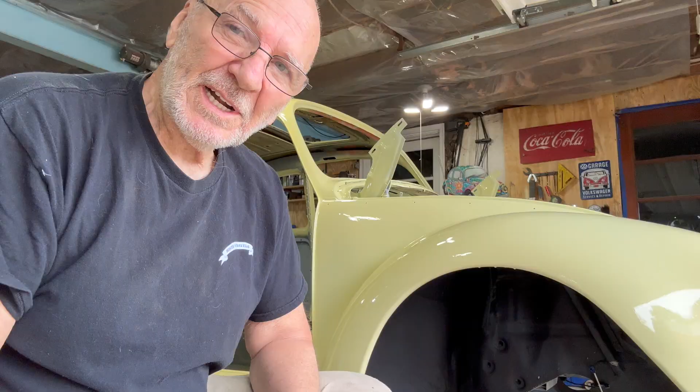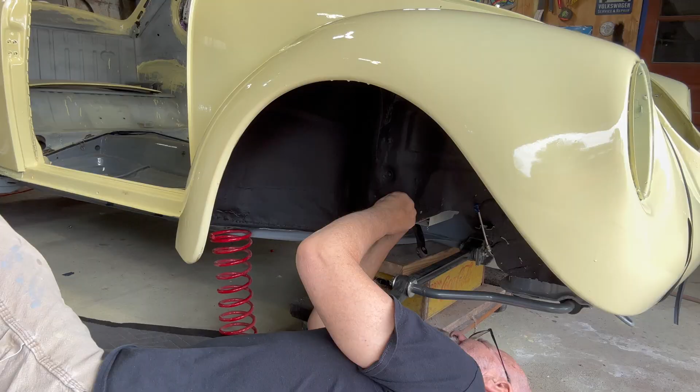First thing we're going to put in is the idler arm, then the steering box. Okay, we get the ratchet now, tighten that up. Okay, that's good, it's tight. Idler arm's in. Now the steering box.

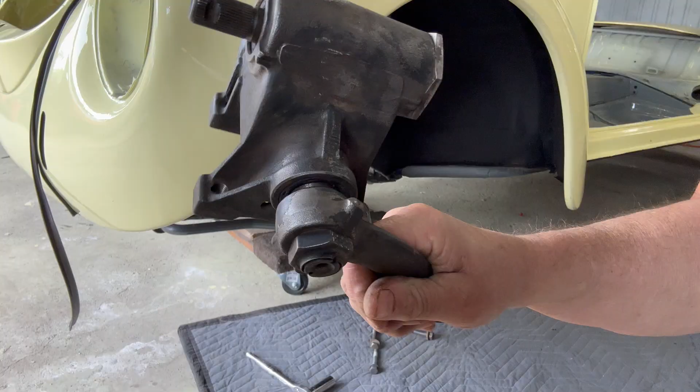Now the steering box. We have a new bushing in there for the steering dampener. Let's get her in.

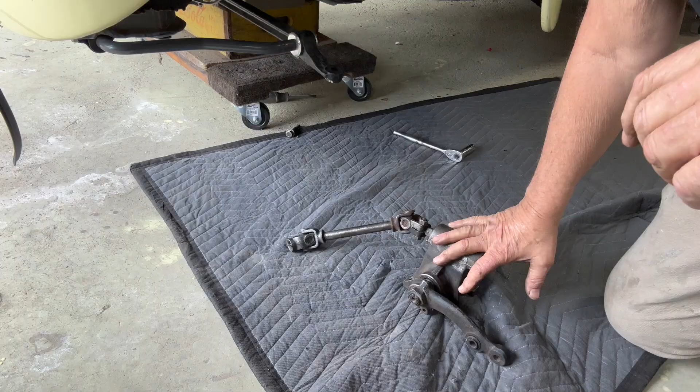Steering box is a little bit on the heavy side. After trying to put it in, it was a little bit of a struggle because it's heavy.

But I realized I believe I need this on in order to make this fitting locked in. So the universal at each end of this little drive shaft that turns the steering box needs to be coupled on the bottom first, I believe. Not 100% sure, but that's what I'm finding out. Okay, I'm going to try to get it up in there and get it connected.

Okay, it's going to be a bit of a struggle. Not as strong as I used to be, but we're going to get it up there.

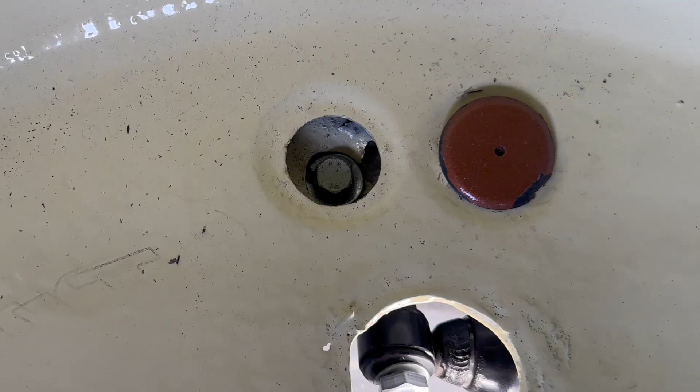Okay, the steering box is in. That's the steering dampener bolt. They're 2 body mount bolts. This is through the Super Beetle trunk. Put your wrench in there and you tighten it.

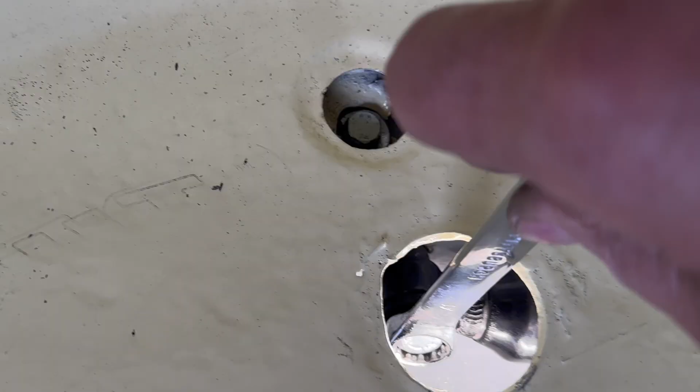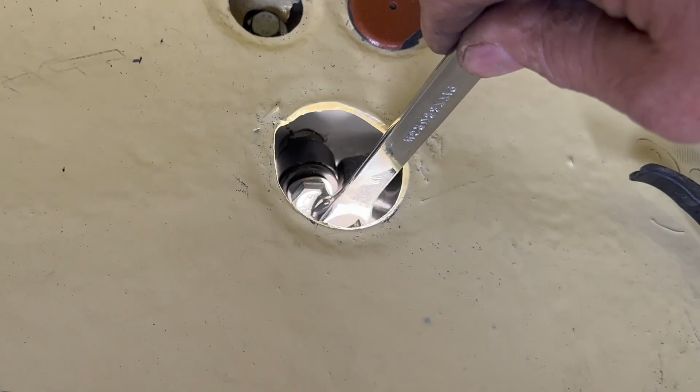A little bit hard to do all this holding it. I'll show you the other end after I get this tight. Okay, she's good and tight. I'll show you the other end and we'll tighten it.

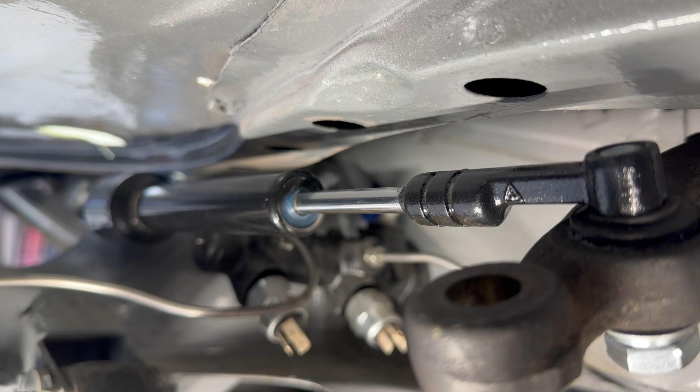Okay, this is the steering dampener. The far left is the side we already tightened through the spare. Now we have to tighten this end. It goes through the steering arm. All right, I'm going to tighten that up. Let's see if I can do it on camera.

I might already have it tight. Yeah, she's tight. That's where you tighten that steering dampener.

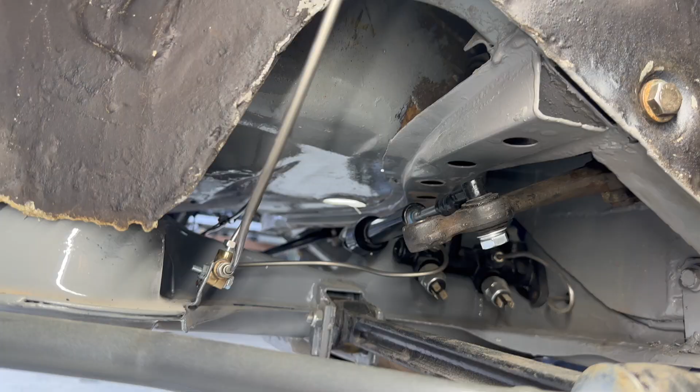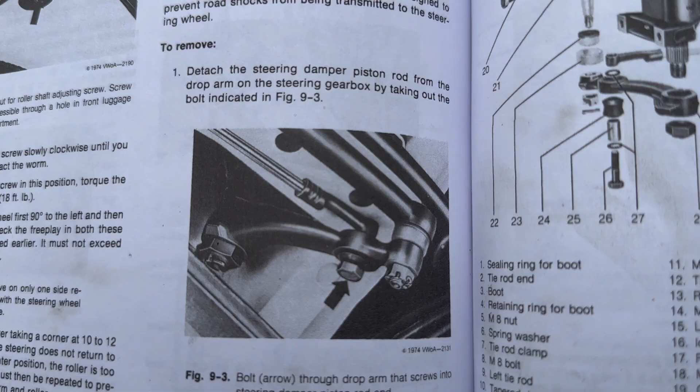Here's a bit of an overview. That's what I did with the dampener, the steering dampener. And this is the Bentley shop book for Volkswagen's Super Beetles. And here's what I'm about to do. It's going to be hard to show you underneath, but I'll show you now.

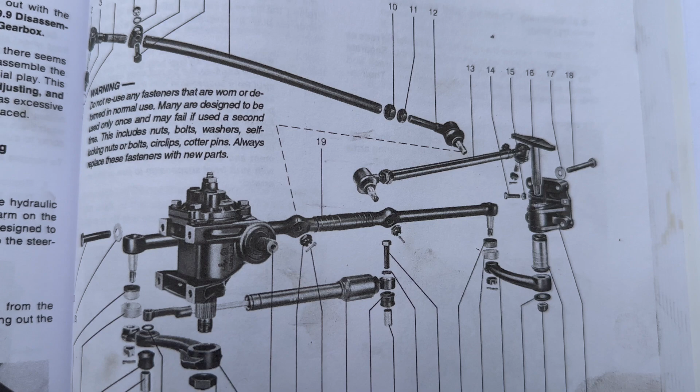I have the steering box hooked up. It's on one end, and on the other end is the idler arm. And I'm putting the drag link that the 2 tie rod ends hook to, which moves the spindles back and forth to make your turning radius. Okay, that's what I'm about to do now.

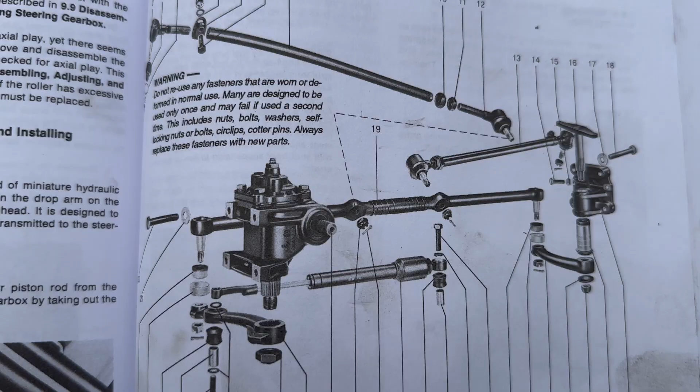Here's the assembly together. I'm going to shove it through from this side into the other side. Kind of hold this like this and run it through.

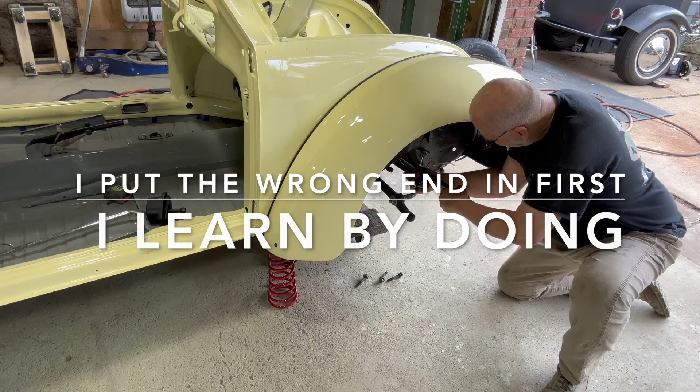The cap comes off here. This goes in the idler arm.

Well, we're going to set the other side up first. Make sure we got this right. I'm going to look at the book again.

Okay, the longest part is what I call the drag link. It drags everything back and forth from where it should go. And it hooks from the idler arm into the steering. And we have to just figure out how.

Let's see what we got in here. Looks good. Gotta mess with the other side.

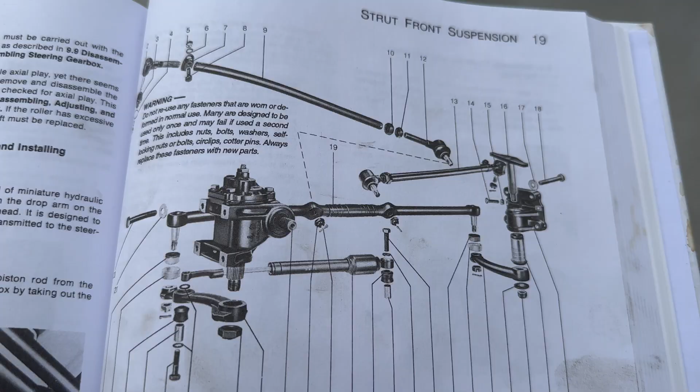Okay, I was struggling underneath there, which I didn't think was necessary to show you because I don't want to teach you the wrong way to do something. So now that I have it figured out, I'll explain to you what my problem was.

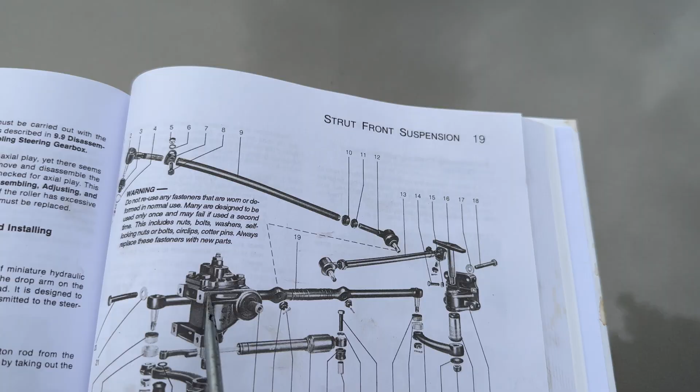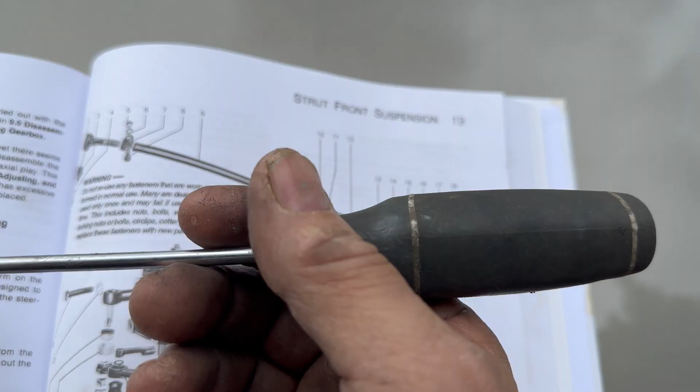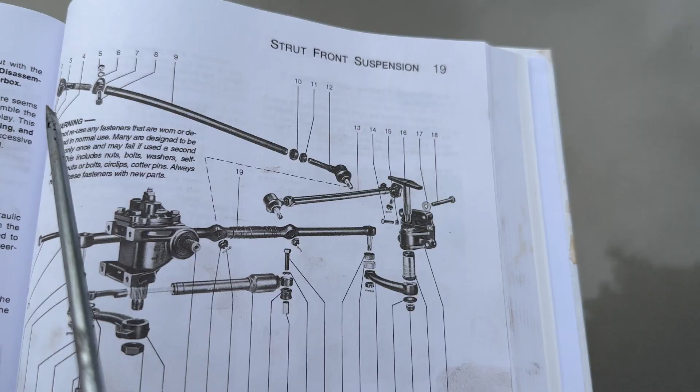This drag link that goes behind the steering box here, goes right across here, that has a right and a left. I had it in backwards where I had to switch it to this side rather than that side, because I couldn't get these tie rod ends into position where they belonged. And the reason was because I had that bar in there backwards.

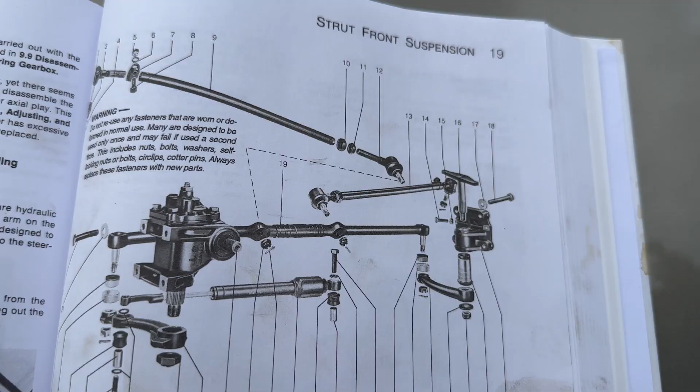So don't struggle like I did. If it seems like you can't put these tie rod ends into this drag link, then flip that drag link around and then you'll have no problem.

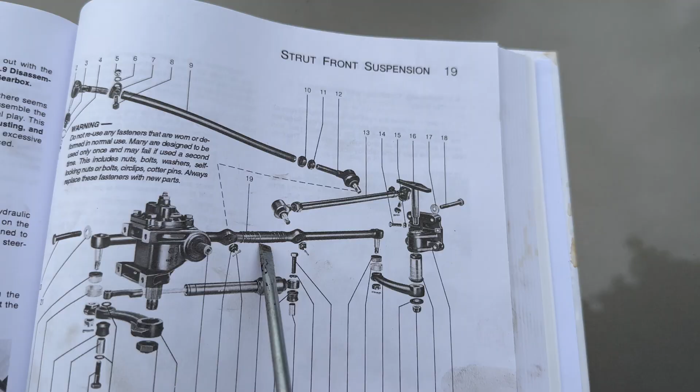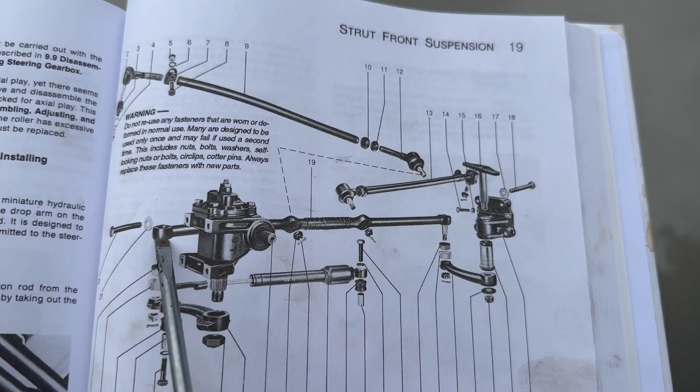I'll show you underneath what it is. Now that I did it, I feel a little silly that I should have just picked up on it to begin with. But you know, sometimes you get off track and you don't realize that there's a right and a left. And that's exactly what happened to me.

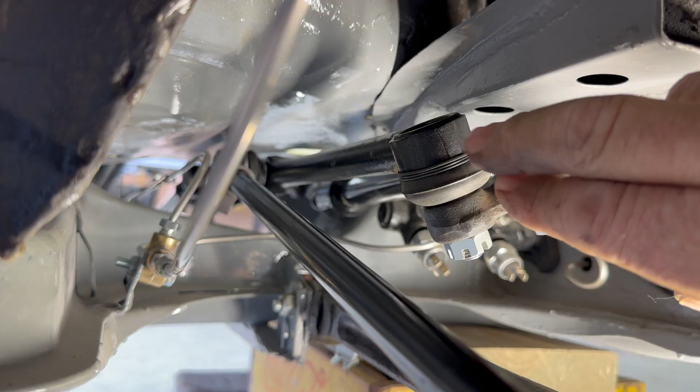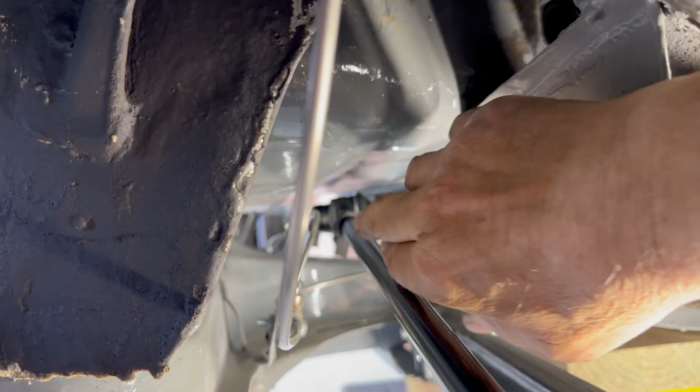So I'll show you underneath. It's gonna be a little hard to explain under here too, but I'll do the best I can. This is the drag link. It goes from here to the idler arm, from the steering box to the idler arm. It has one end specifically made to go to the steering box. If you flip it around backwards, then these fittings up here on this tie rod will not fit.

So I'll try to bring that into focus a little better. See, that tie rod has to go that way on the drag link, and the one on the opposite side also. They should be in front of this trailing arm. I hope that explains what I did. I'm going to show you the other side too. If you flip that drag link around, it ain't going to work.

I'll show you the other side. This is the driver's side, with the steering box. Okay, this is the passenger side. There's the drag link connected to the idler arm, and in the center the tie rod end is connected. You can see the orientation of the ball joints inside the ends, the heads. I hope that helped out. I should have looked at a video before I started. All right, get back to it.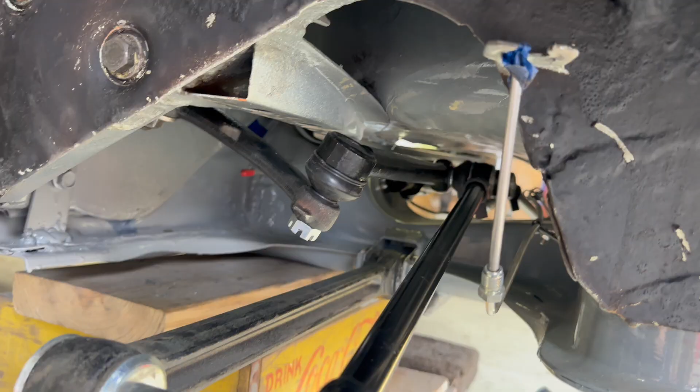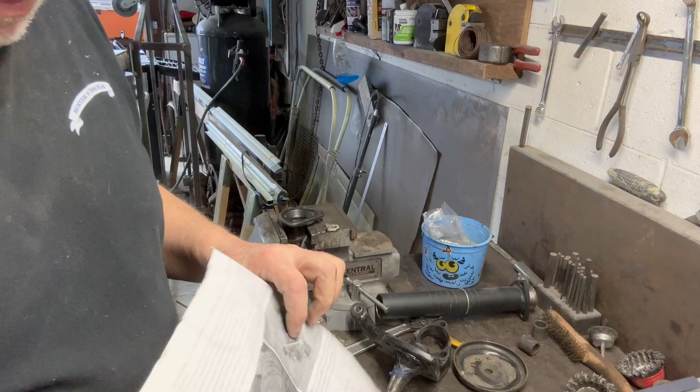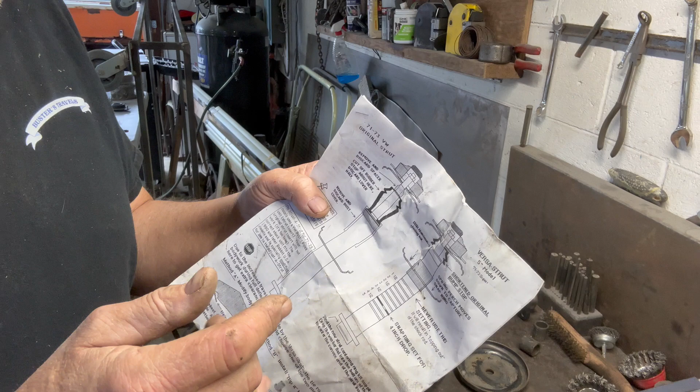Okay, let's build a strut tower. Now I have to mention, this is a TopLine Pro Rally Lowering Kit. Comes with everything needed for the front end, things for bump steer, new stops. It comes with everything you need, and it tells you on here how to adjust. I'm going to go to 4 inches, but I'm not quite ready to do that yet.

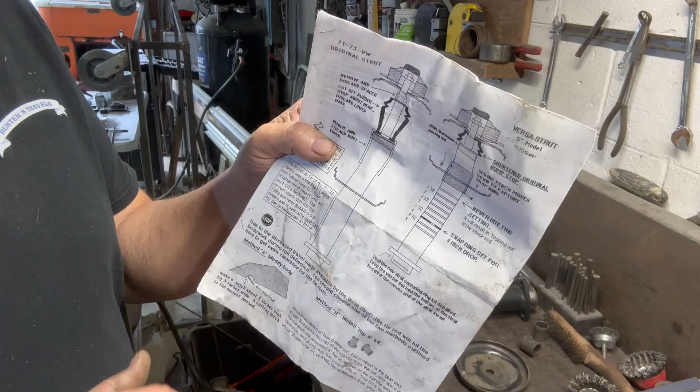I'm going to put the bottom end of the strut tower together and show you how that goes. Now this is similar to a factory one, but it's different at the same time. Again, this isn't a factory one, it's a Pro Rally from TopLine. John is the owner of the business and he's a great man.

Okay, ball joint. Driver side spindle.

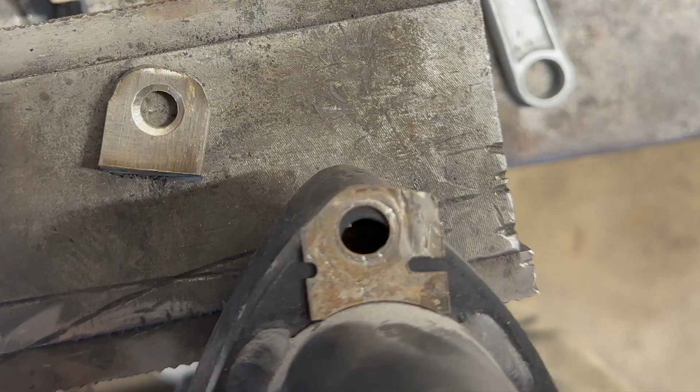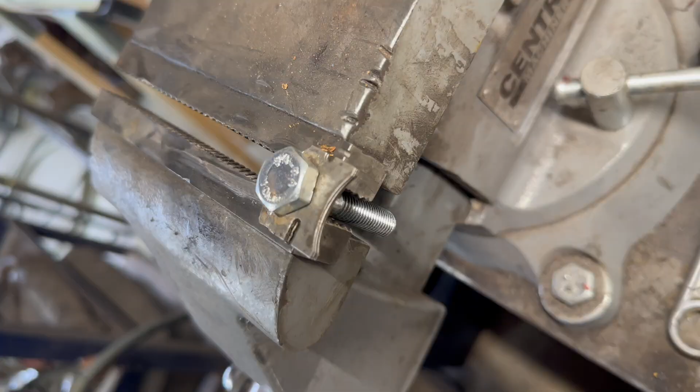I see now we have to trim these down a little bit. I have heard that in the past, so I'm going to trim them down now. I'll show you what I mean. They need to be trimmed a little bit. See, it's not quite centered with the hole. All 3 of them would be like that. We're going to trim them down next. I have all 3 of them stacked together on a bolt. This is where I have to trim, a little bit off here. I'm going to do that right now, and then we'll see if they're where they have to be.

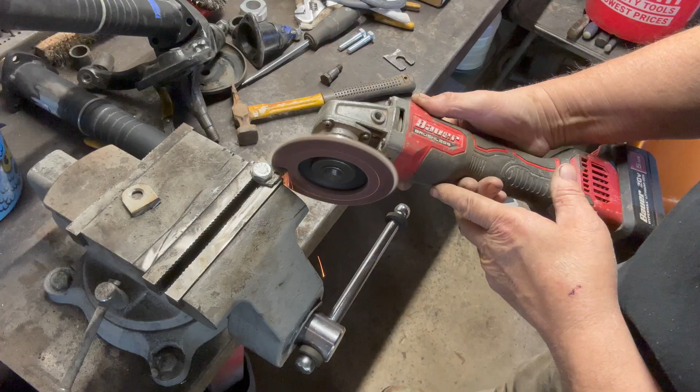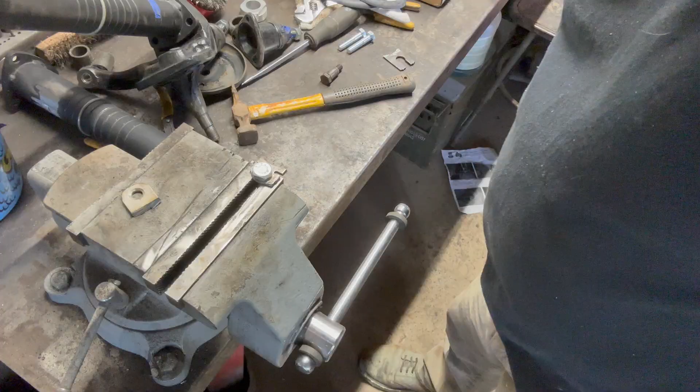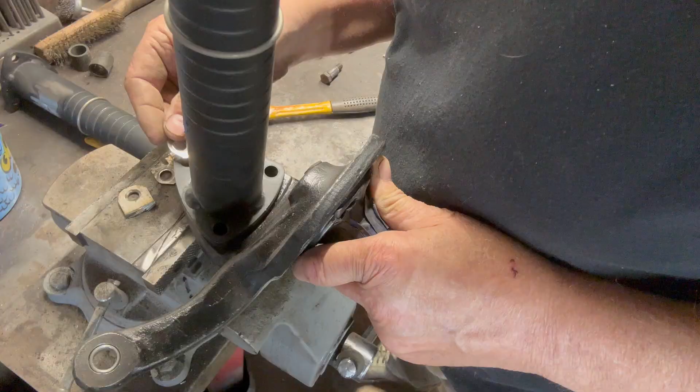Didn't need much, so that should do it. We'll give it a try. We need a little bit more. That should be plenty. Yeah, let's try that again. I like the old sayings, like if at first you don't succeed, try again. I think that did it.

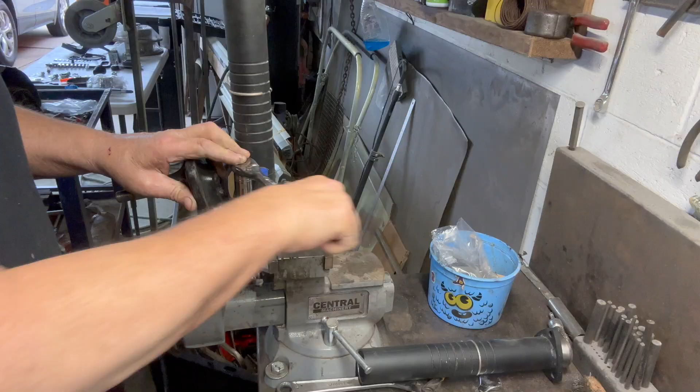Okay, let's tighten these. We're gonna have to use a wrench. It's gonna be a little slower, but it'll do the trick.

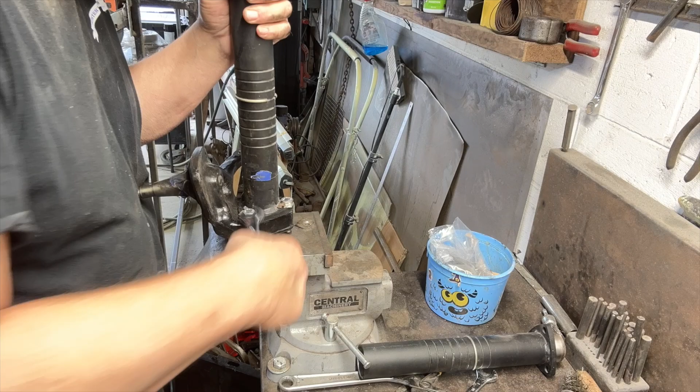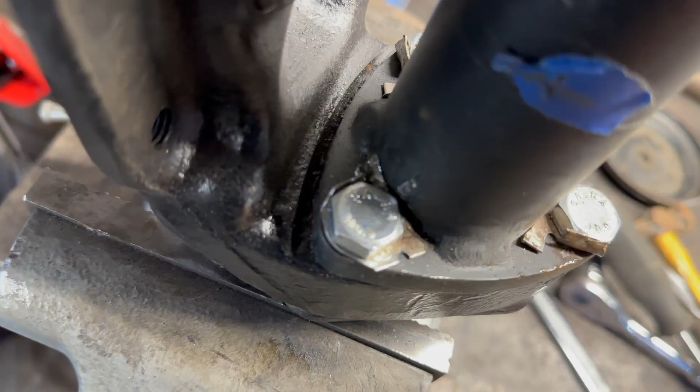Okay, now we gotta bend these tabs up. They'll actually lock the bolt from turning. Here's an up close look. See, the tabs are bent to the flats of the bolt.

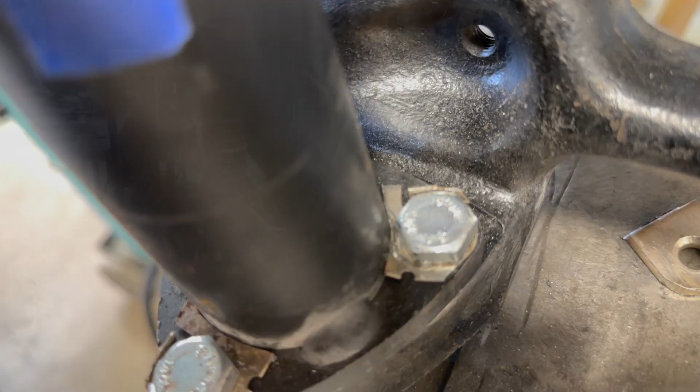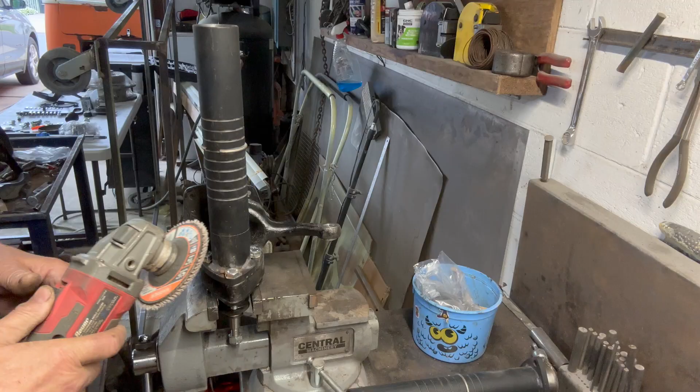All right, next step. These adjustable strut kits don't come with this. This is for the speedometer cable. So I'm going to clean up this spot and weld that on there. They don't come with them on, and I like them on. They give you an attachment, but I'd rather have a solid mount.

Okay, we'll turn the welder on. Like I mentioned, they don't come with the tabs on, so I'm adding them. This is for the speedometer cable.

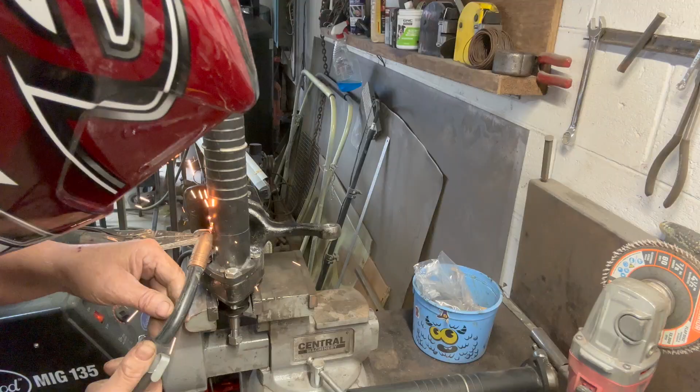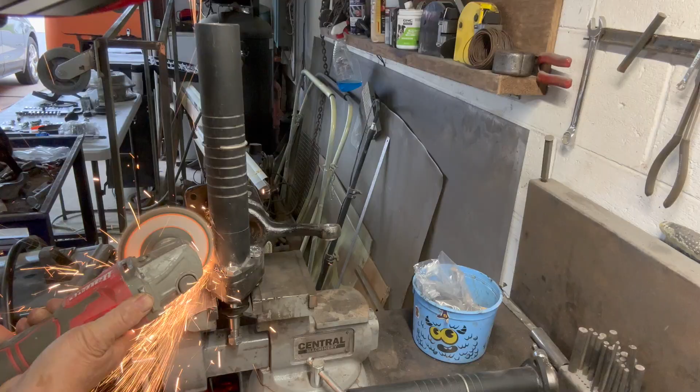Clean it up a bit. Okay, that's for the speedometer cable. That'll be perfect. Now we got to add the one for the brake. We'll weld that on the other side.

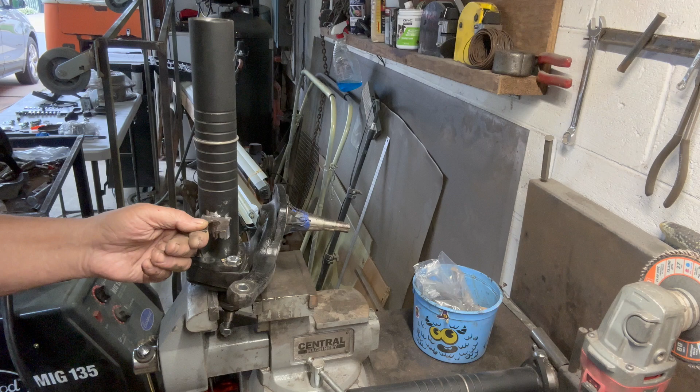You can't just put these in any random location. So I'm putting them here, this is where the flexible brake line will go into it, and then the solid one will come out and go to the caliper, because I'm putting disc brakes on this. I'm going to weld that in place there, and we'll be in good shape.

Okay, we have that welded on. Let it cool down, then we'll go to the next step. Clean it up a little.

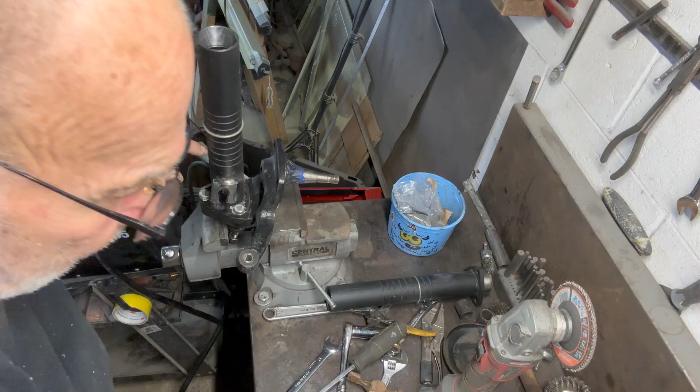All right, now we're going to drop this ring down to the third one. By dropping it to the third one from the bottom, it's going to give us a 4-inch drop. That's what we're shooting for, we're low on the front end, 4 inches. This locking ring is a little tough to move, but you just keep at it. We want the third one up. One more here.

We'll snap it in place. Okay, we're good to go there. We're going to give it a little tap, make sure it's nice and tight. Okay, we'll paint these up a little so they don't rust.

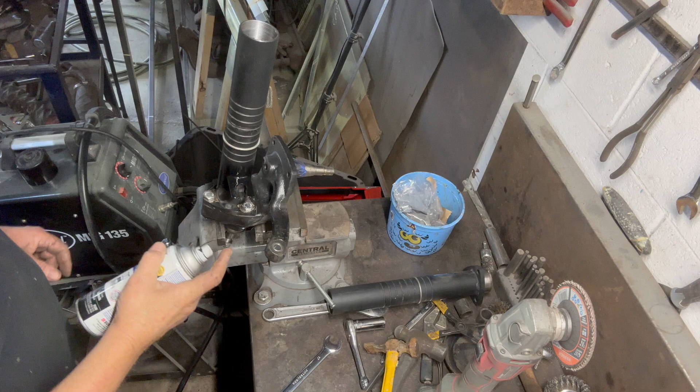Okay, I dropped the ring down to the third, bottom one. That'll give me a 4-inch drop. Now here's the spring perch. That goes on like that.

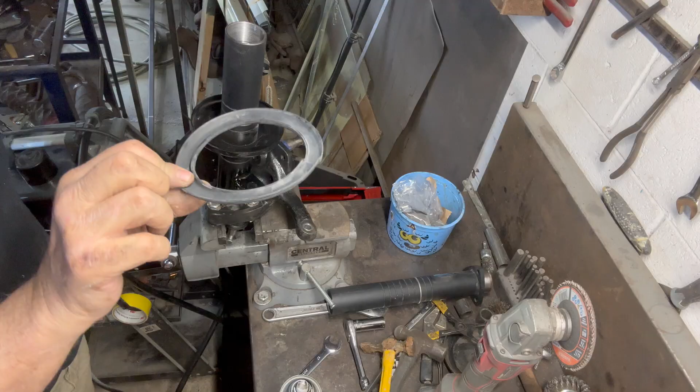These are tough to find at times. It took me 2 months on back order. But they're a rubber, I don't know what you call it. I can't think of it right now, I'll put it in the video. But it's a rubber for the coil spring that holds it and keeps it from making noise, rattling and all kinds of stuff like that. So that goes in there. The spring sets on that rubber.

Next, the TopeLine kit comes with this alignment bushing. Goes in the bottom here, and it holds it centered down inside the shaft so it doesn't move or wobble. And it also has one that goes up the top. So it holds it nice and steady inside there so you don't get movement. Nice design.

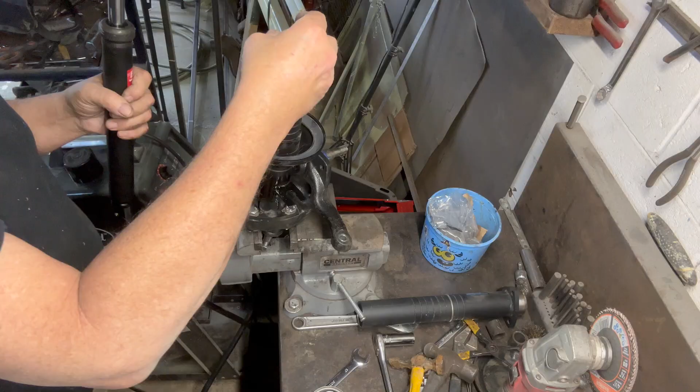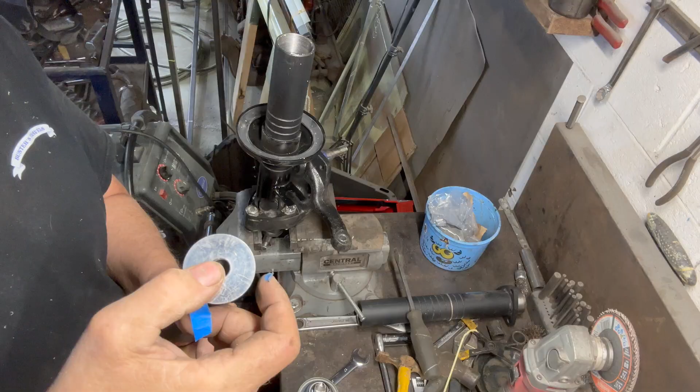Okay, you drop this in, which I'm doing right now. You gotta make sure it's right. I dropped it down in at first. It's hard to get it the way you need it. You need it on the bottom like this. So I'm gonna put a little piece of tape on it. It won't take up no room to hurt anything. And I'll put it in like that.

Okay, I put tape on it. It's not going to hurt it. And that way it makes sure it centers. Perfect.

Okay, now this top piece centers the top. Now, they give you this lockdown section out of billet aluminum.

You don't want to over tighten this because it's aluminum, but you want to make sure it's good and snug. Okay, we're good there.

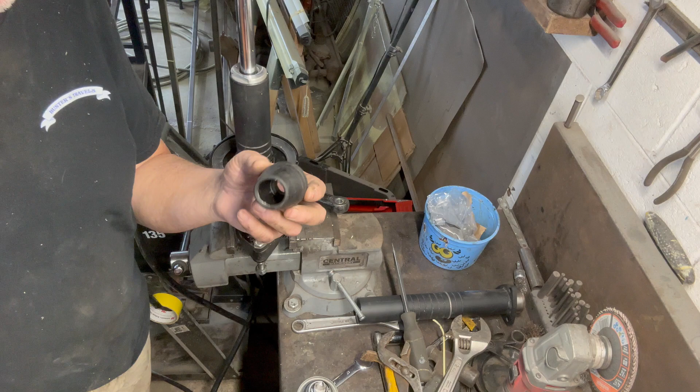Next, we need the bump stop. In the kit comes a shortened bump stop. You definitely don't need the one from your original. If you're just doing, you have the original, you cut it in half to use it again. I have a little washer that goes in here. The bump stop goes on there. Now we got to get a spring.

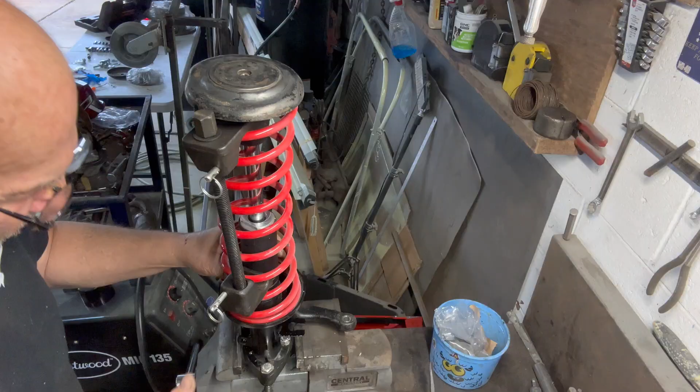Not going to need much, that's for sure.

There we go, we bottomed out. We're tight now. Well, that was a learning lesson, but we're in good shape.

I have a cap somewhere for that. Okay, let's see if we could get that in place. They might call it quits for tonight.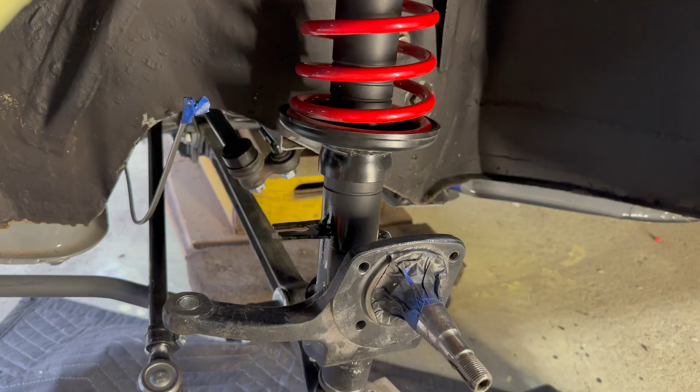Okay, I put a 2x4 on the sway bar where it goes to the connecting link and sat on it, which brought it down low enough that I could put the bottom in the ball joint and then put the top up in where it belongs. Very hard to film. Now I know how to do it, it'll be much easier the next time.

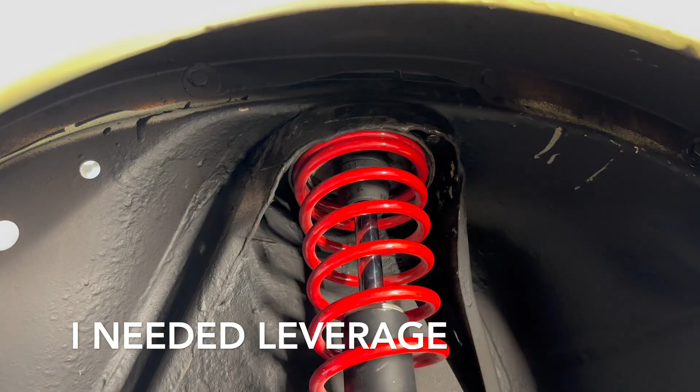I did struggle, but I'm showing you what I did, so hopefully you won't struggle. But you know, I can't put everything on film or these will be 3-4 hour videos and nobody will watch them. But I did struggle.

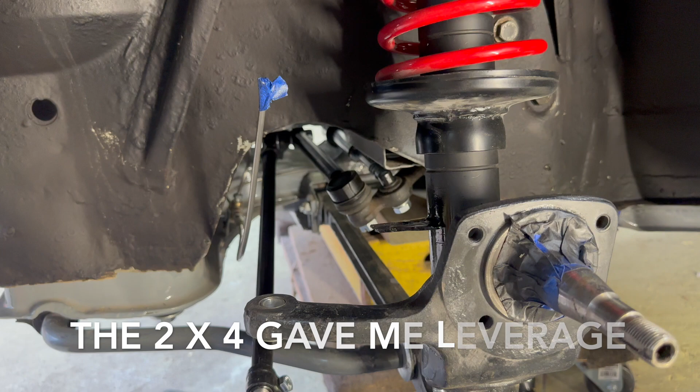The 2x4 on the cross member, on the sway bar, and the connecting arm worked perfect to bring it down enough that I was able to put it up in the spring perch. And now I could put the bolts in up top and then tighten the one on the bottom.

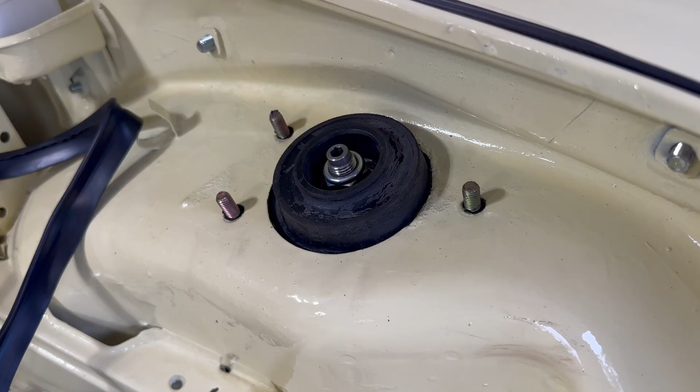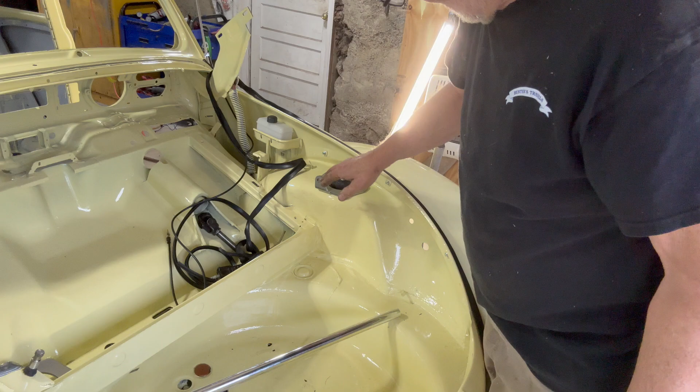See, there's the top all lined up. All right, we're gonna put a connector on there, which will connect both towers. This is another type of truss bar. It's gonna go from spring tower to spring tower to keep the front end from flexing. Don't know if it's needed, but it sounds like a good idea.

I gotta tighten them bolts down. They're 13s. And they're nylock nuts.

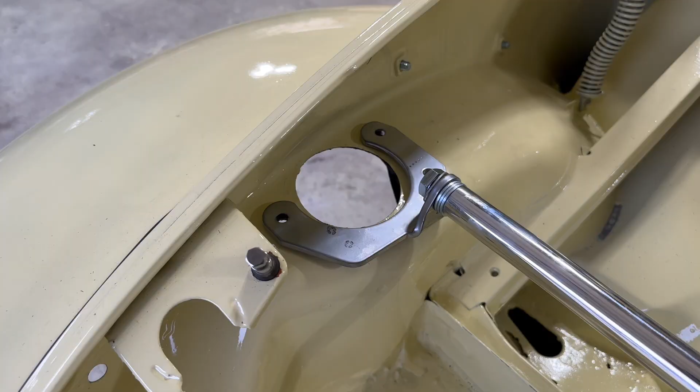Okay, now we attach the bar. Okay, that's one side. This side needs to be done yet. Tomorrow's another day. Did quite a bit today. Enjoy your project.